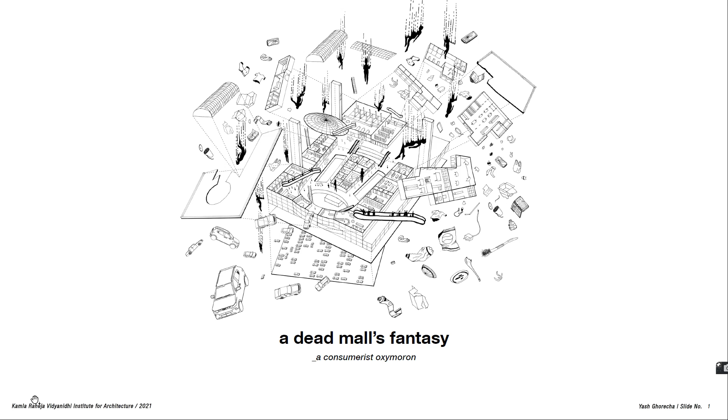Even before this video began, maybe you were shown an ad about the food you've eaten, or that new phone you liked that came out recently. You had to wait for the next 5 seconds while it happened, or maybe nothing at all. Every piece of information we consume daily, be it a short video, an article, or even music we listen to, is layered with consumerism. That's how this neo economy of attention functions. All media, everything tailored to perfection for you and your desires.

We live in a time and place often chaotic and confusing, mediated by images and languages dictating our truths and reality. We become what we consume. This very internet becomes a space of performance for our abstracted realities, a constructed spectacle representing one's own self.

And just like Rene Magritte's painting, this is not a pipe, I am also not real. This is just my voice recorded from a script written in a Word file being relayed to you from a Google server located in some place across the world. With this constant consumption of imagery, we often begin to blur the boundary between the real and the image, even if it is for a minuscule second.

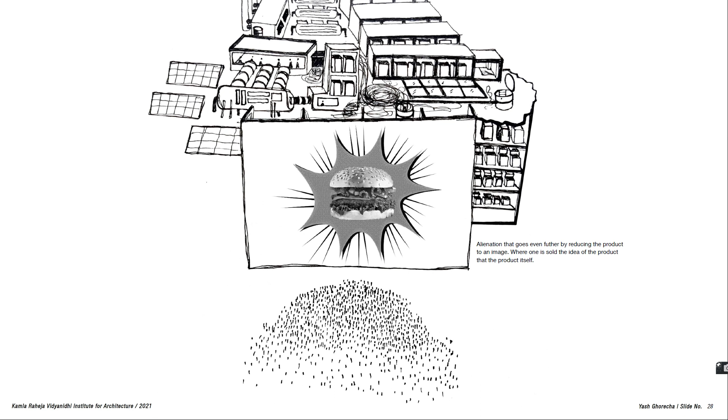As Guy Debord explains it, the spectacle cannot be understood as a mere visual deception produced by mass media technologies. It is a worldview that has actually been materialized. While an alienating gap between the modes of production and product exists, this new form of alienation goes even further by reducing the product to an image, where one is sold the idea of the product rather than the product itself.

As culture, leisure, sex, politics, and even death turn into commodities, consumption increasingly constructs the way we see the world. The decision to buy a washing machine or a shirt depends less on the finances and more on one's subjective reaction to everything, from TV shows to crime and pollution. Behind this fantastical image of consumerism lies a grim reality.

Although this new mode of communication has transformed the way we operate in this world, surveillance capitalism certainly seems to have commodified even our very existence and behavior. All things you like, dislike, and are curious about on the web are collected, collated, and sold to companies, which then sells it to another company, which then sells it to another company in a forever endless loop. We become pawns of consumerism, one among thousands of people sold to companies for free to sell more ads only for us to buy more products.

A bigger problem that starts to arise with this fast mode of consumption is the ever increasing manufacturing footprint of the products. Reports show a massive overhaul in environmental damage: 10% of the carbon emissions produced per year, more than international flights and shipping combined, is regularly contributed by the fast fashion industries and other manufacturing companies. This directly stems from the root cause, which is the fast-paced, mindless consumption rate of the consumer, and this is only from the production sector.

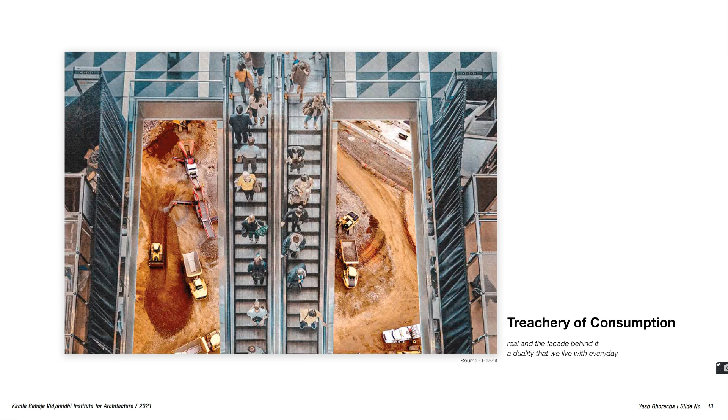Capitalist commodification becomes the storm that relentlessly propels us into the future to which our backs are turned, while the pile of debris before us keeps going skywards. This is what we've called the storm of progress. And this seems to be the kind of consumerist future that we seem to be heading towards.

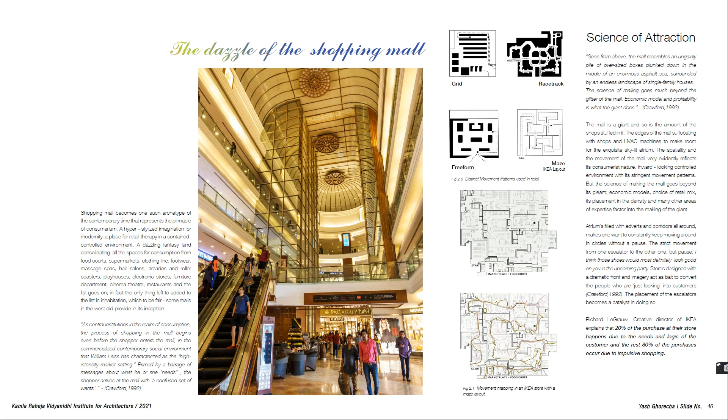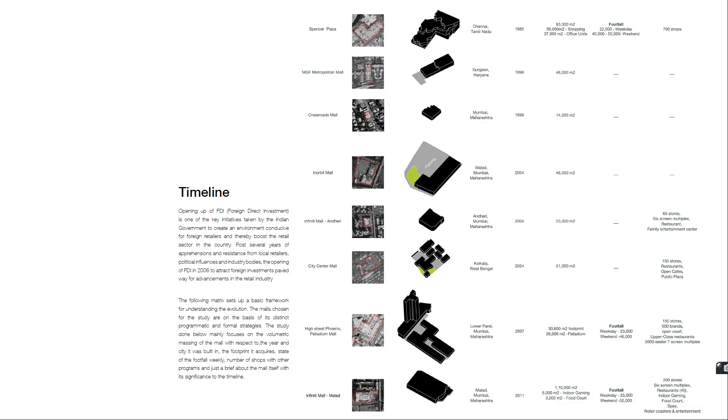The shopping mall becomes one such archetype of the contemporary times that represents the pinnacle of consumerism, a physical manifestation of India's post-liberalization aspirations made possible by the FDIs. From the 1990s, we witnessed a tremendous boom in the retail industry, with a relentless push towards this new form of commodification. A hyper-stylized imagination of modernity, a space for retail therapy in a contained and controlled environment. It works like a machine to generate one's own perceived identity.

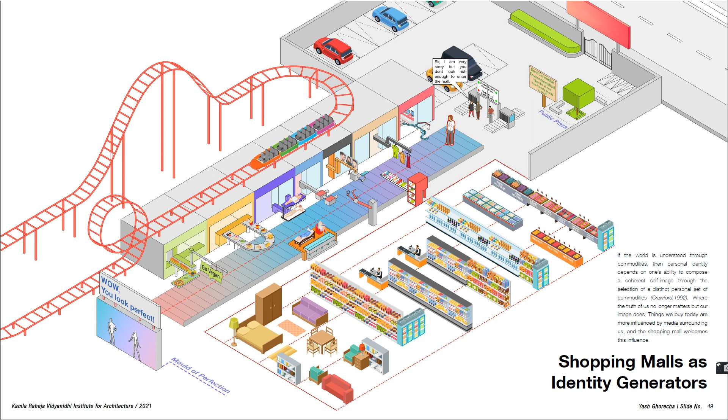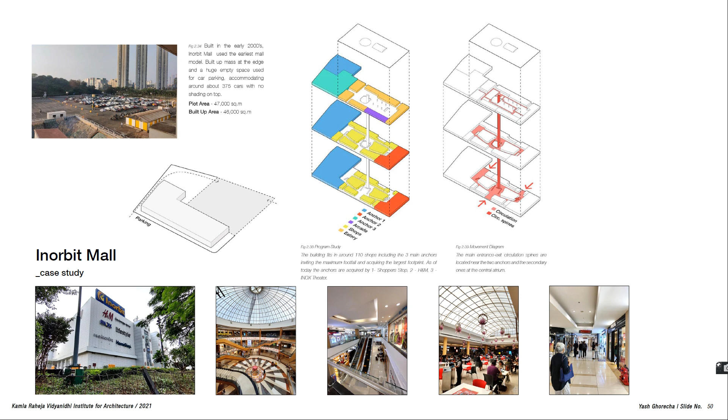Upon further study, one finds the extensive science that goes behind the making of the mall. These structures are designed with this kind of control in mind. Long, intentional movement patterns studying across shops designed only to entice us into consuming endlessly.

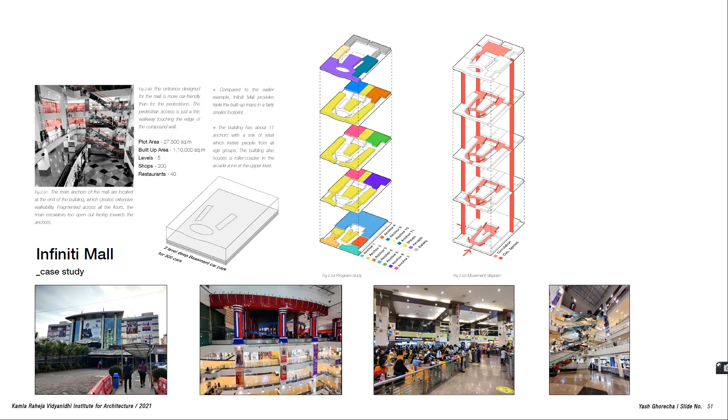Over time, this evolution led to the death of its own creation due to several reasons. Even before the pandemic, the malls had started seeing a sharp decline in its visitors, mainly due to the decentralized online commercial industry of Amazons and Flipkarts. There is a rise of these large footprints laying derelict with no purpose or people in them.

The thesis asks the questions: what happens to these consumerist temples post-consumption? Beyond just constant consumption, what is the relevance of this image that the consumerist architecture creates? What does the image mean for the city?

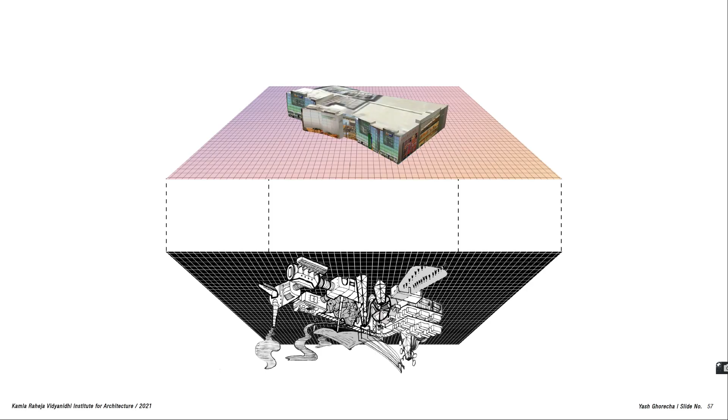The intervention strategy turns the metaphor of the mall upside down into an infrastructure that addresses the afterlife of our consumerist lifestyle. The strategy for reinvigorating the dead mall doesn't fetishize its schizophrenic nature, but rather makes an attempt to subvert it by materializing the dematerialized ideas on which the mall is built on.

It begins by deconstructing this act of indulging with the commodity. The bodies that once participated in collective gratification still happen in the same building, only in ones and zeros. Long cold aisles of servers mapping each ad click, still serving the same purpose, but dehumanized in the physical space, participating in the larger phenomenon of surveilling capitalism.

Machines recycling the colossal amounts of waste created by our discarded products, bridging this vast alienation between the product and its manufacturing processes, allowing a chain of a circular manufacturing process and resourceful assemblage functioning within the city.

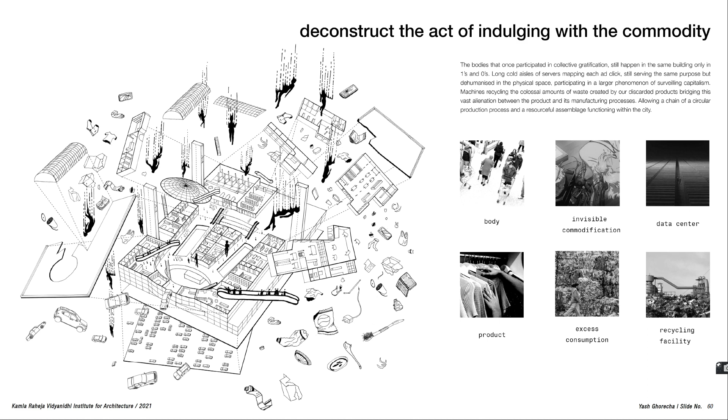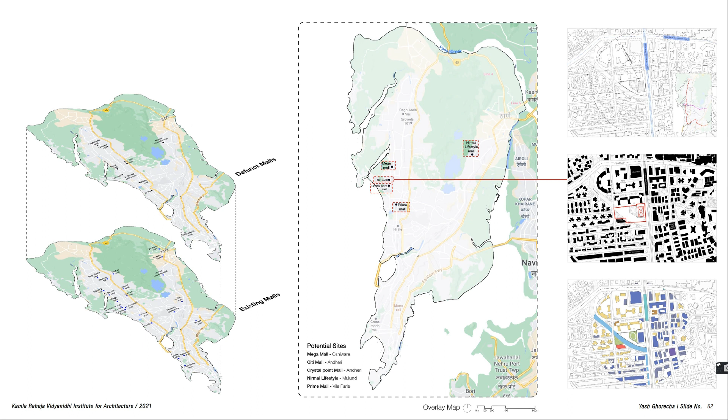From the study of the existing fabric of the dead and functioning malls in the city of Mumbai, one of the oldest buildings, Citi Mall, was chosen. The site is layered with a mix of movements and different usage of land around it. The mall has been dead for the past few years, being on the same site for almost 20 years, yet generating no footfall whatsoever.

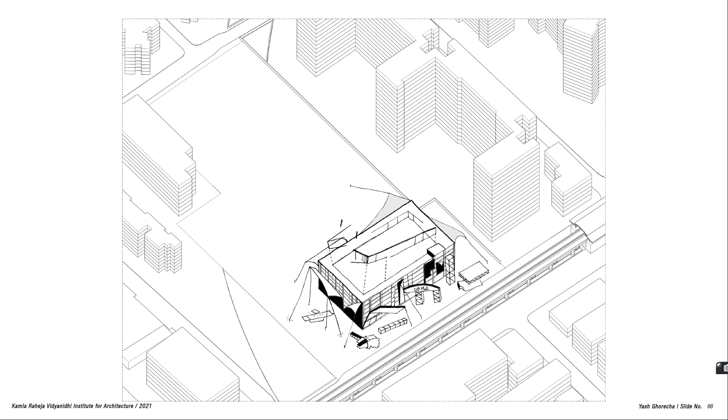The intervention begins with the hypothesis of deconstructing the existing building. Stripped off of all its whims and fancies, the structure is left bare with no facade, to be repurposed as infrastructure.

A thorough study was done in order to understand the semantics of the existing channels of waste treatment in the city, right from the time the resources are extracted to manufacturing, discarding, the way it is treated by the formal, informal channels, and how some of it is recycled and how some of it ends up in landfills. The waste produced includes a plethora of resources: plastic, paper, e-waste, fabric, etc.

The same study helps devise the position that the intervention takes as a recycling facility. The intervention sits in the middle of this, recycling the waste back to a resource in a circular process.

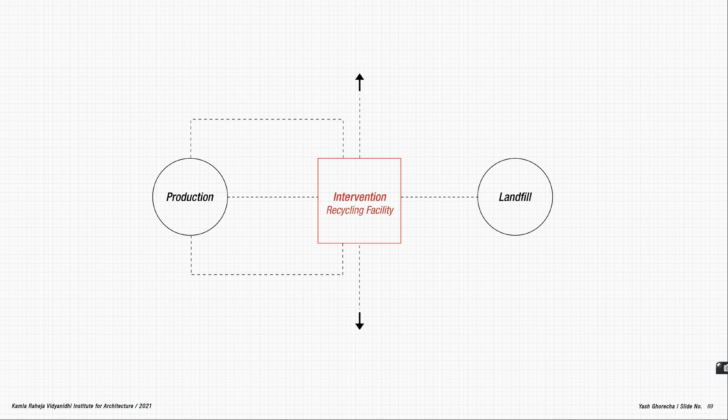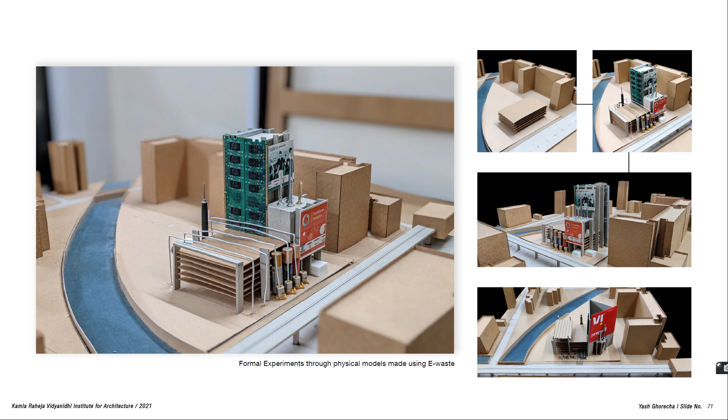How does the existing grid mutate into a living machine? Building on this idea, I tried out several experiments and iterations that would help devise a formal language for reusing the existing structure. The building is programmatically chopped up into three pieces, with the center for the recycling facility and the edges for the data center.

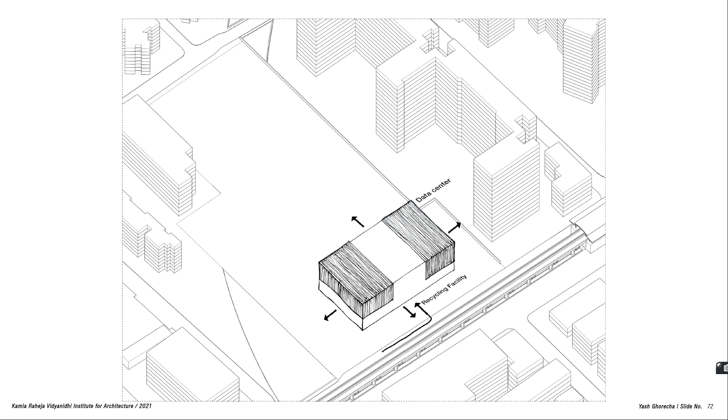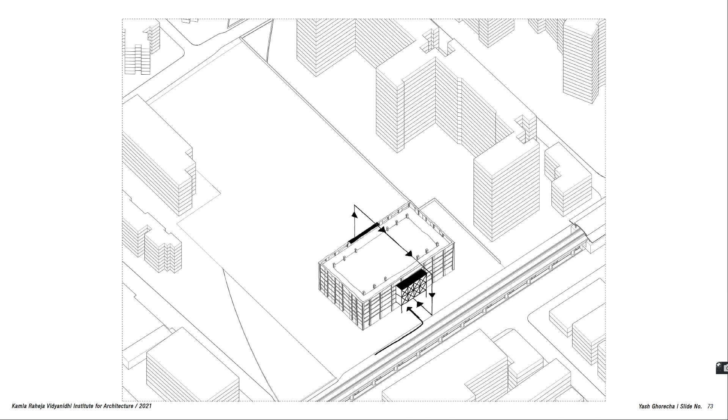The ground will then start to interact with the movements of the site below. The structure grows volumes in the front and the back of the building. The atrium now becomes a segregation zone, and the central part of the building is upcycled to function vertically. The building grows upwards, towers for the data center, almost surveilling the city.

A marker like a mutant that changes its figure over time, and dark fingers holding it afloat. The monolith is broken down at the bottom, with interjections that open the structure to its surroundings.

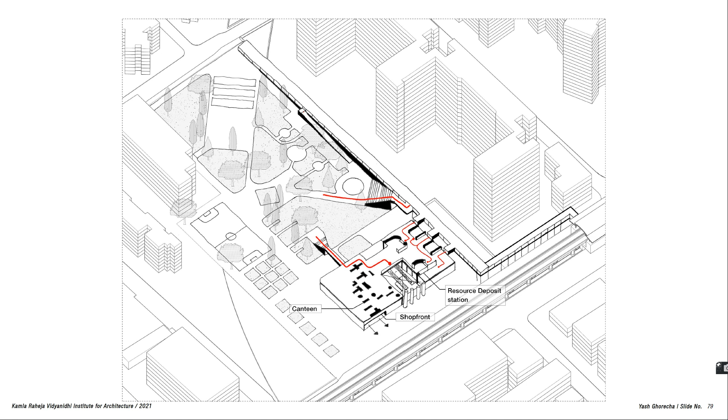The absence of our bodies is the afterlife of the mall. An object in the museum that is the city, the mall celebrates its own death.

The columns marked in red show the existing structure, and additions made to the building are in black. The upper part shows the shop front and admin offices where the main day-to-day operations of the waste facilities take place. The main lobby opens up to the staircase core leading all the way to the top with access to all the floors and the data center.

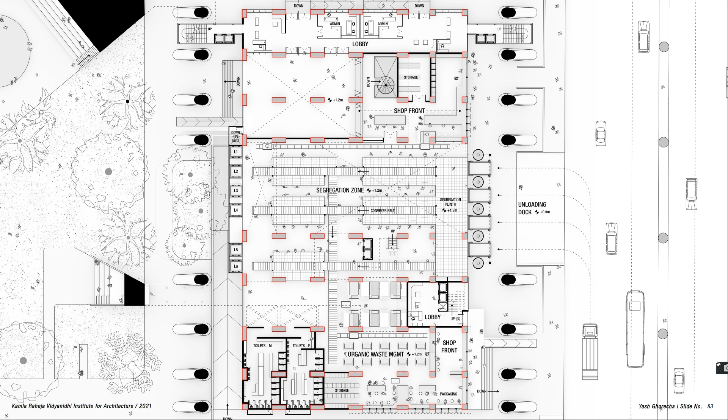The central part, the atrium on the ground floor, is turned into a segregation zone where the waste is loaded and unloaded onto the plinths, which then goes onto the conveyor belt and then lifts. From it, the bottom leads to the organic waste management department. The two main shop fronts are provided at the edges that allow for easy interactions with the public to drop off discards or place orders.

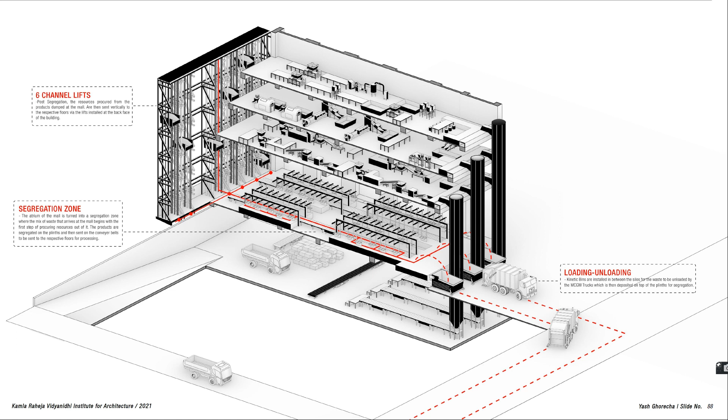The animation further shows the functioning of the recycling center that works somewhat like this. The MCGM trucks unload the collected waste from the ward to the kinetic bins installed at the front, which then deposits the waste onto the plinths for segregation. Once segregated, the waste goes down to the conveyor belts and then to the lifts at the back, which then takes it to the respective floors where the materials are processed.

The floors are installed with several machines that are also used by existing facilities, like the hydraulic press baling machine, eple and fatka machine that compresses metals and plastic bottles into fine shreds that can later be melted and used in several processes. Fabrics of t-shirts and plastic, small metals from electronics, can also be processed to be used again in the products. Once processed, the storage silos at the front become a mediator between the packaging and the processing units.

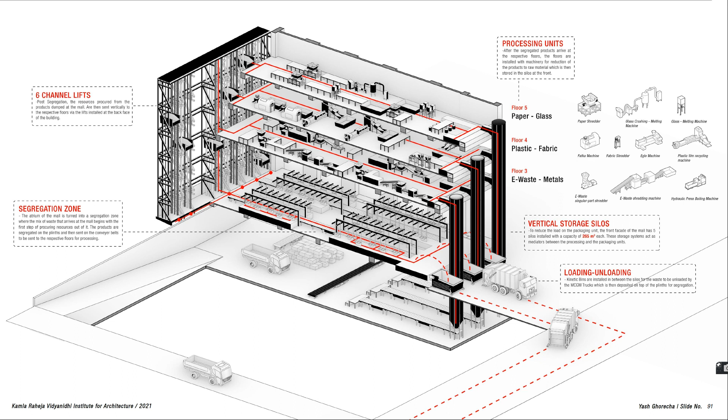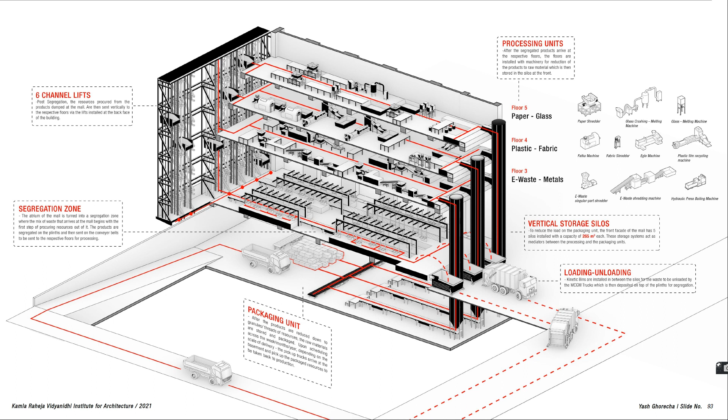These can withhold the processed resources up to a volume of 265 cubic meters and help reduce the load on the packaging department. Once in the basement, after the products are processed and reduced to granules, the raw materials are stored and packaged to be picked up upon scheduling into the open market. The mall now is repurposed with the loop of circular renewal of resources from our own discards.

On the first floor, the skywalk interjections connect to the mall and seamlessly slope down into a ramp and open out to the garden as an amphitheater. This allows for simple interactions between the public and the mall. The bottom half of the mall becomes a refreshment space for the people working at the facility to rest and eat at the canteen. The staircase core fitted in the middle is provided separately for ease of movement for the workers in the facility.

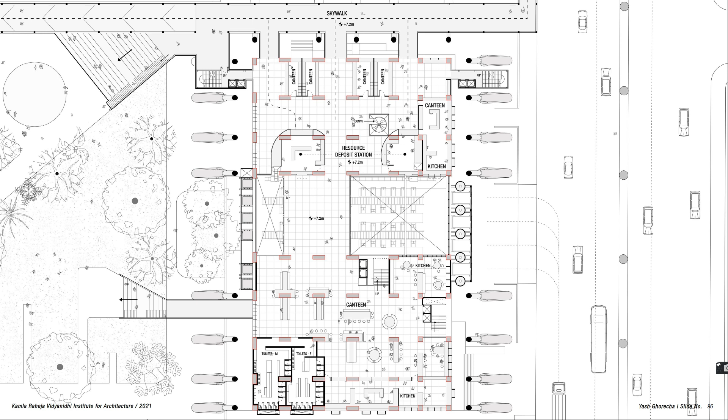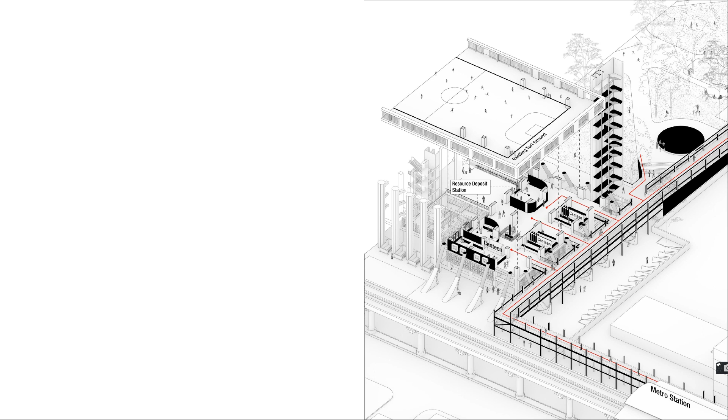Canteens in the front become a pause point for the public and the people working in the facility. The south node of the mall punctures a connector with the organic waste department, where the treated organic waste can then be used in the garden at the back or sold separately to an individual at the shop front. The viewing bridge connects to the other side of the mall with the resource deposit station. Here you can simply see the processes of waste management from above.

On the top floor, the existing turf ground is retained with a new roofing system.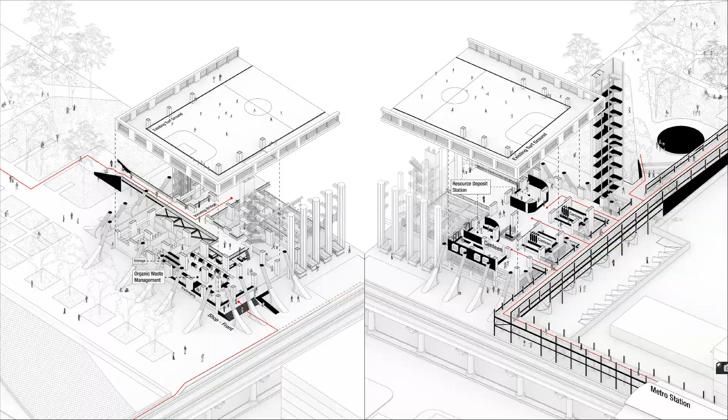A holistic wall section through all the programs mentioned before, with the volumes of the silos added to the front facade. The structure of the silos acts as a thin steel scaffold attaching itself to the existing grid with a layer of 25 mm diameter tensile bracing provided for the span within the typical grid of 4.5 meters by 4.5 meters, and a layer of polycarbonate sheets on top which allows translucent natural light to brighten up the spaces within.

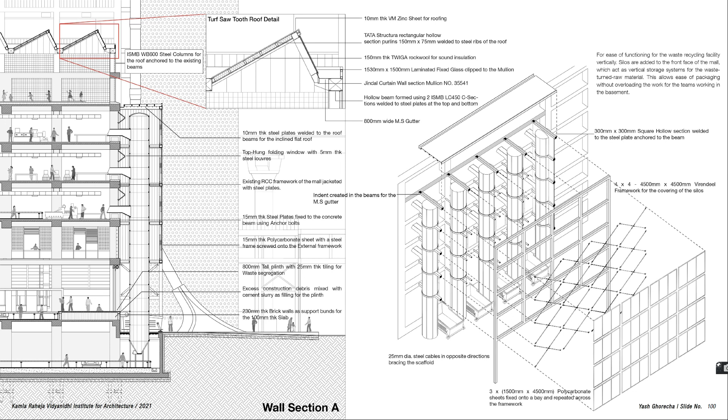The new additional roof added to the turf ground uses a sawtooth roof detail, supported by the added steel columns, that bathes the ground with light from the west and also accommodates a clear height of 5 meters. Just an added note for this and further slides, do pause on any of them for more details and information.

On the floor above, we reach the divided section of the mall, with the data center on the two ends, and the central part is the e-waste and metal processing facility, as seen in the working of the recycling processes earlier.

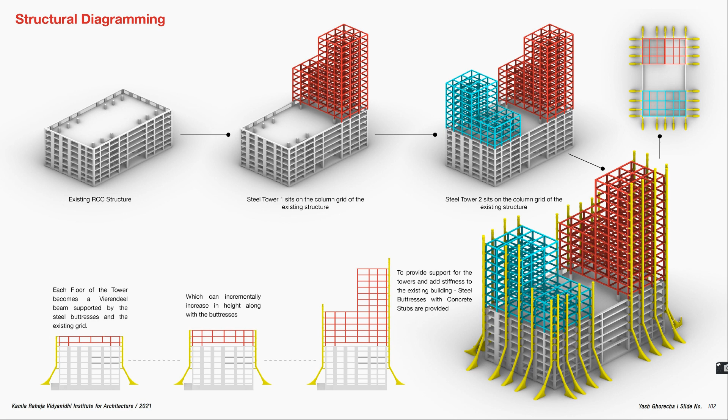With the towers rising up at the top of the building, the grid used is the same as the building below, and in addition to that, the buttresses not only stiffen the existing structure but also help support the structure above. The way the system works is that the floor in itself becomes a beam supported from the sides and the points from the edges.

This wall section cuts to the staircase core of one of the southwest towers, showing the breathable perforated skin for light and ventilation. All the additions made to the building are in steel, with the blank faces that use a Corten steel detail that rusts and changes with time.

The 1000 mm dia hollow steel buttress moves about 6.5 meters away from the existing footing. The joinery at every junction of the column is done such that it allows for incremental or decremental growth of the structure.

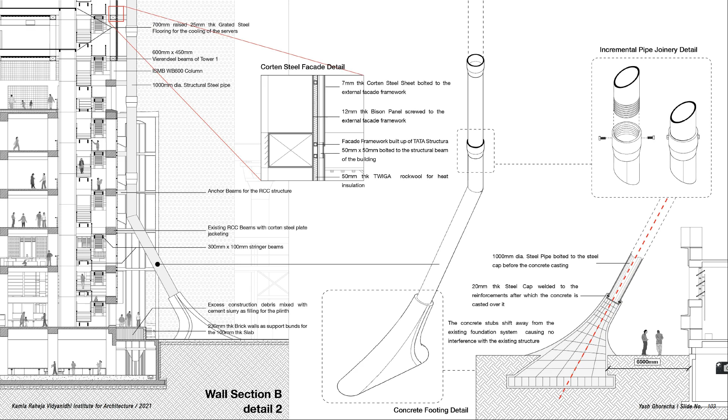The staircase core in detail shows the breathable MS perforated sheets used for the staircase cores on the sides of the building.

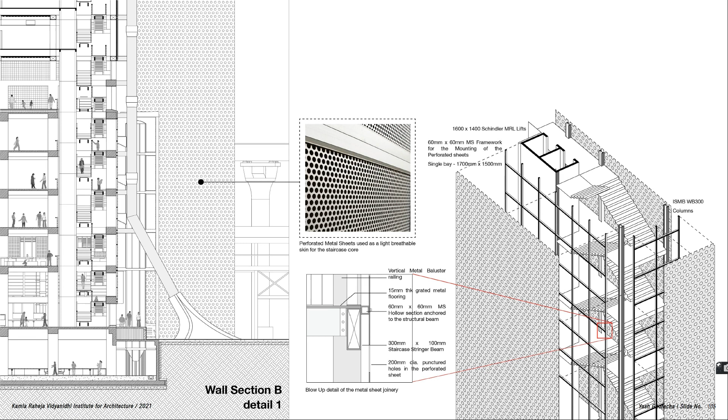The exploded axonometric shows the design of a typical room of a data center, where the floor is raised by 700 mm from the concrete slab for the cooling of the entire room to happen from the bottom.

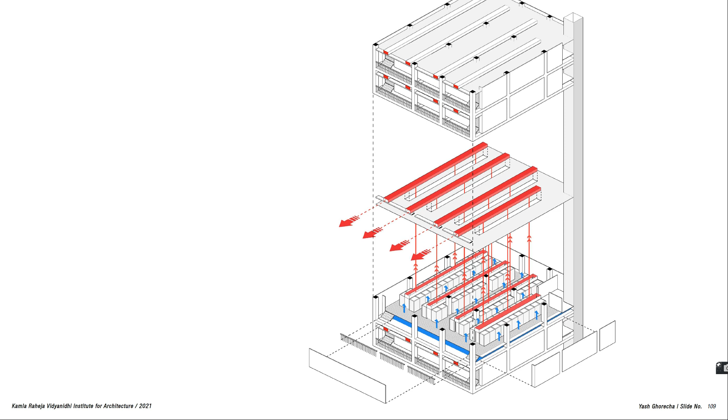The heat released from the servers is trapped into a duct at the center, which rises up and is let out from the ducts above. The space provided at the front is for the compressors and other machineries used for the cooling of the facility.

The south face of the building capitalizes on solar energy collection with a solar wall to help with the energy consumption of the building, generating about 1,000 kilowatts of energy daily. The collected energy efficiently helps reduce the energy footprint consumed by the facilities of the building.

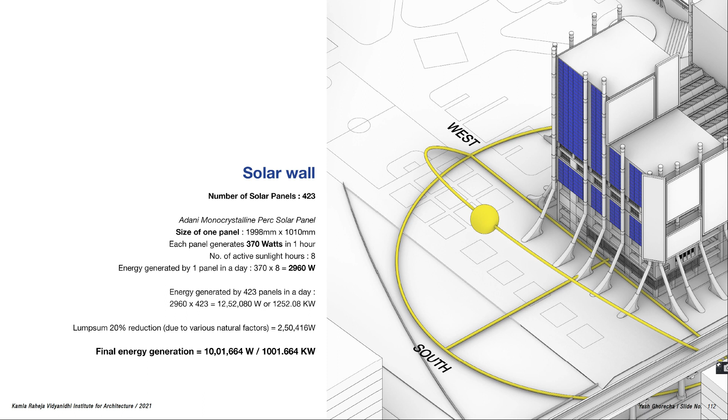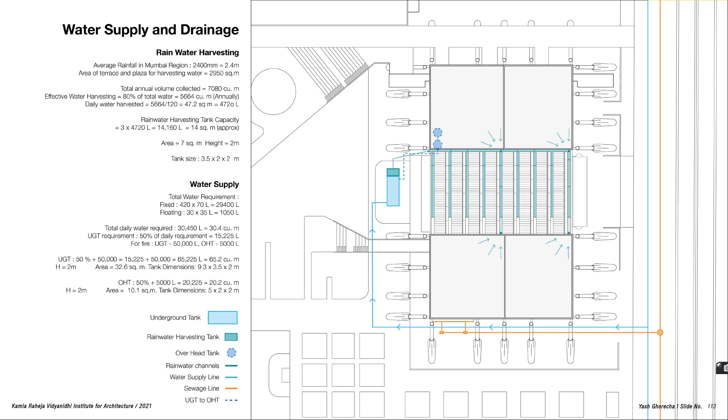There is a degree of chaos with this new dehumanized form of the mall, with servers bleeping in silent rooms, warmed by our presence, still serving the same purpose, an eerie place for everything.

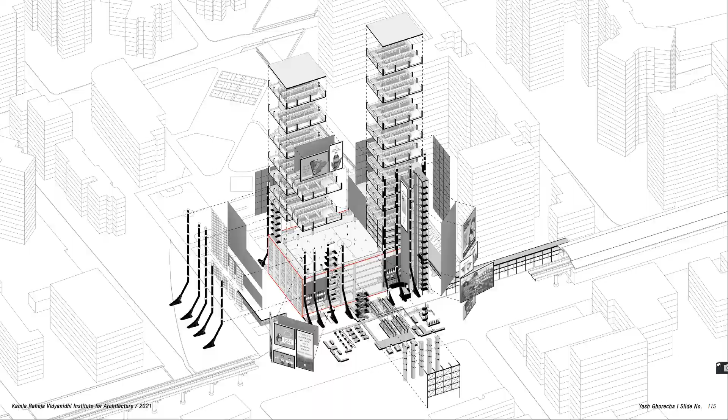Products that once left the mall bagged in shimmery bags come back to the same space, fractured only to be recycled and sent again to the production systems.

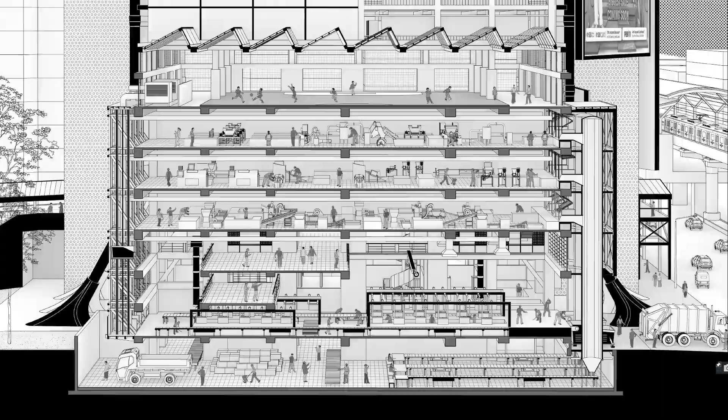The mall absorbs even the darker parts of its own, materializes it, and performs yet again, even if it is with its own counterparts. The architecture of consumerism is still a spectacle with this new infrastructure that takes precedence yet weaves itself with the city and its people.

An image that holds a mirror to our civilization and questions our ideas of consumption. The thesis isn't a case of a distant dystopia, but only a speculative imagination of our identities and lived reality, an invisible creation of our own, the other side of this storm of progress which is now materialized.

The gears of this consumerist machine still run in sync with the way things are, but today the mall tries to save and fix what it can, and maybe that is a dead mall's fantasy. Thank you.